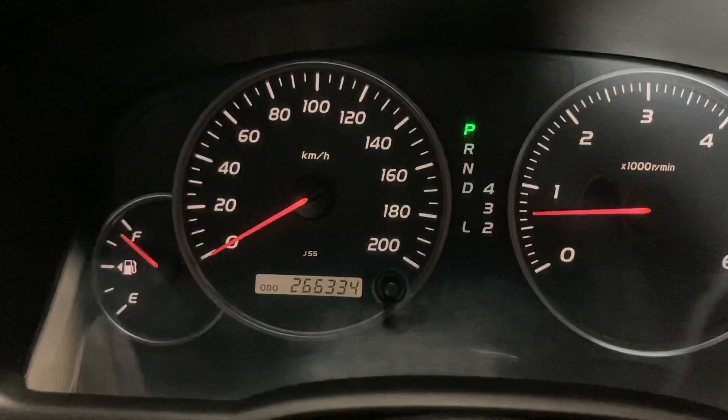But let's first quickly have a look at these readings so you can compare. If I've put the videos in the right order, when you saw a 266,300, that's this vehicle. There was probably a couple of videos on it, injectors and all that. Had an oil leak at the cam seal. This is that vehicle, okay? Let's have a look at these readings so you can compare and know what a 120 with good injectors reads at, okay?

One of the main ones we look at, which is available on a scan gauge.

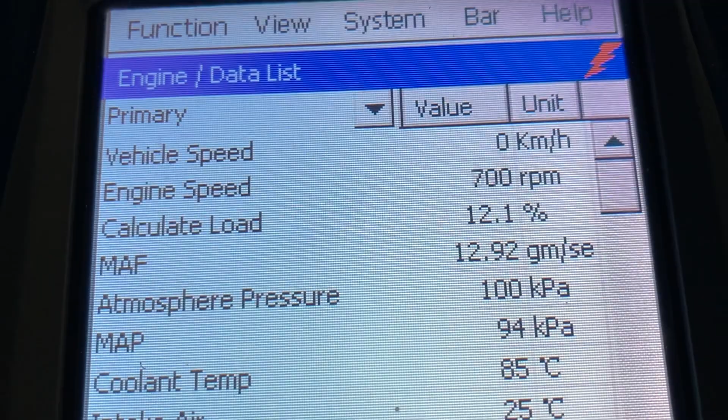But you can see the load reading. It's not just yak I'm talking. We need to spend the time for you to look at that load reading. One of the common ones again, 120 Prado, 1KD-FTV, 5-speed auto. Load, you've got a fair idea by now that it's around 11 to 12 when everything's working, happy days. Now that could change a little bit with a new suction control valve. This one's still got the short one, it'll get changed later.

Let's quickly slip down to those other readings, and then we'll talk about this noise in case you've got that noise and you want to know what it is so you can eliminate it, okay? I'll explain what it is and pop the before and after photos in there. No, let's finish this, okay?

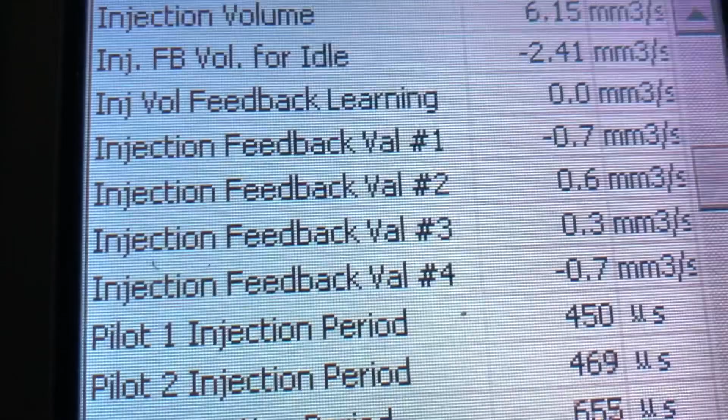Injection volume, at the top there. You can see it's around the 6 mark, a little bit under, a little bit over. For an auto, that's fine. It'll be lower in a manual. It'll be higher in a 150 Prado. Hiluxes, 4-speed, 5-speed manual, they'll all be different. You've got to watch the specific videos.

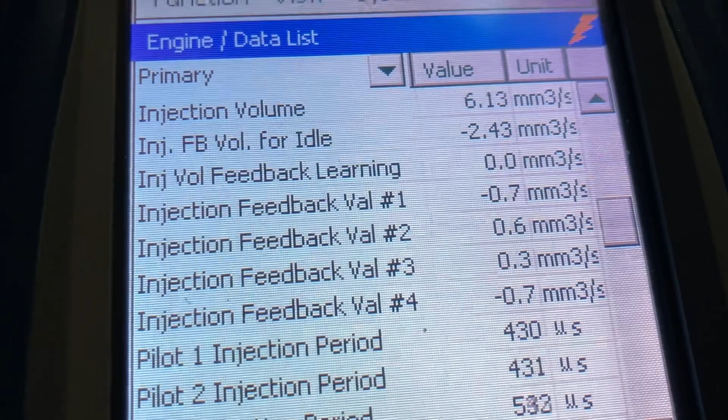So the engine's running hotter than normal for whatever reason, we don't know. But not an injector problem, okay? When it got to that temperature, maybe there was something going on with the combustion. Anyway, long story short, they tested fine.

Since then, we've put them into another vehicle, a client slash friend, because we want to do multiple tests to confirm. So they're in another vehicle. It drives beautiful. It's quiet. We can push it around and it still doesn't get hot or anything like that, like this other vehicle was. There's nothing wrong with the injectors. So prior to that confirmation, obviously, I have to pay for the testing. I gave him a small amount of money back for the injectors, but it put me in a position, what can I do?

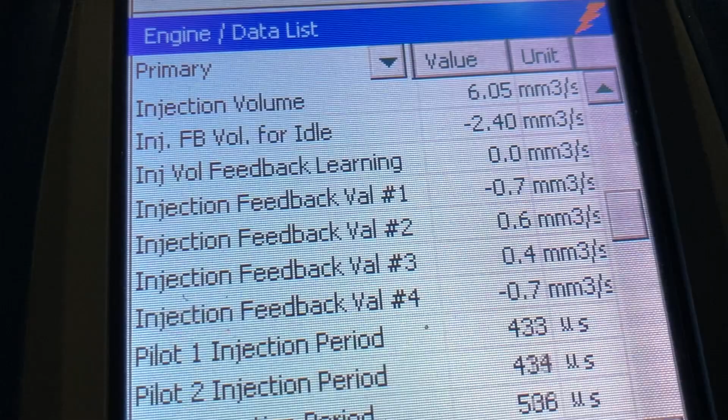There was nothing wrong with them, and you've actually ended up with who knows what, and especially who knows what sort of job. Anyway, moving on back to this. Feedback values, don't worry about them, because people worry about things too much. See, we go off topic, but it's always important information. There's going to be 3 topics in this video, right?

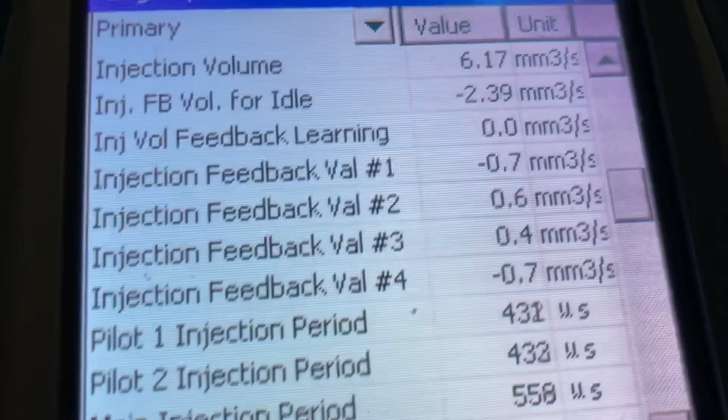We've never had a problem with a brand new injector, okay? Thousands of injectors. They're built by machines. We check them for damage. We've never had a problem, okay? Feedback values. If we see a reading like 2.2, or the highest I normally see would be, you might see a 1.7, minus 1.7, 1.5, somewhere throughout the whole range, worst case scenario.

When they're cold and they're warming up, I don't really care. These things happen. Let's have a look at what it is once it's fully warm. As long as it's not going over 3. If it's going over 3, that's the limit. Then we want to look at all the other readings. What's going on? Let's do some investigations, okay? So I want you to relax a bit if you see readings like 1. Who cares? I don't care what it was before. Old flogged injectors can have really even feedback values, and new injectors can have readings.

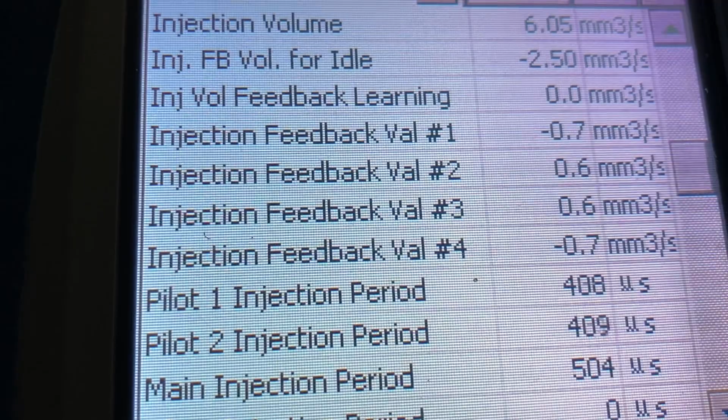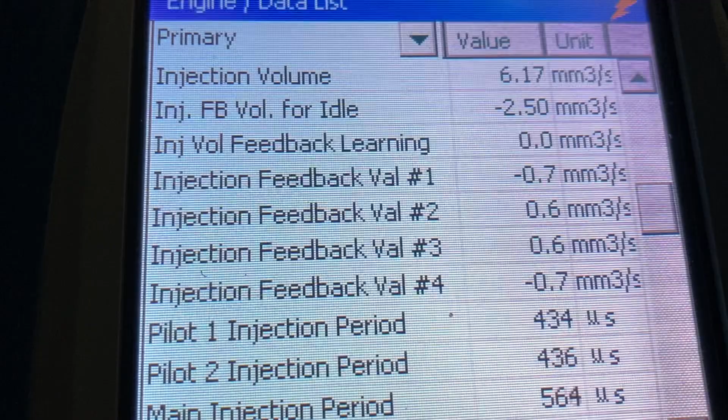That's why it's not just my talk, yak, yak, yak. You get to watch these readings and see what's happening, and by now you should know. You can see pilot 1, pilot 2 now. You know that they're normally around 430, aren't they? And see how it's jumping around, going 400, 450, okay? This is telling us probably fuel pressure. That suction control valve is causing problems.

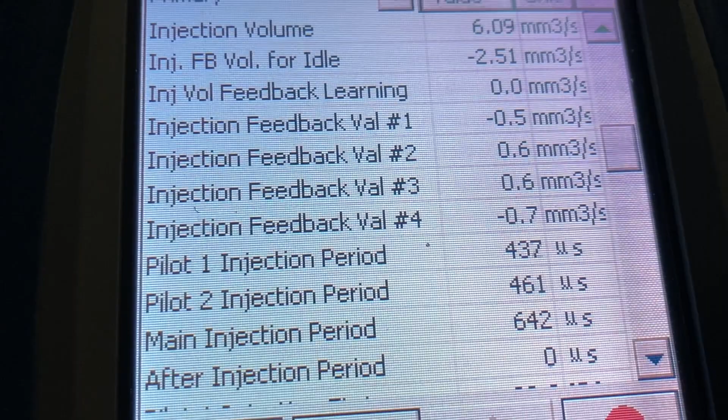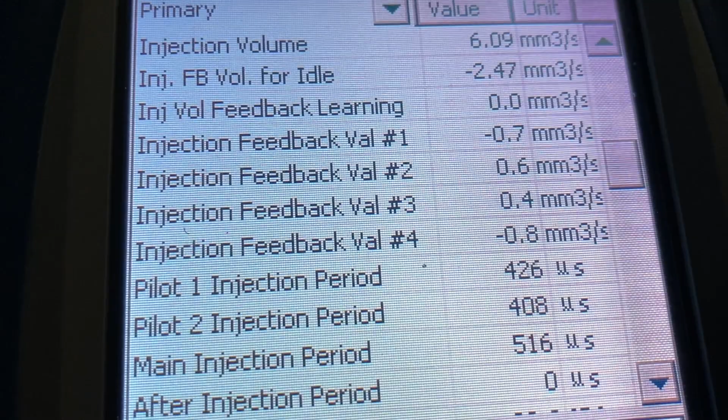Unfortunately, we're not replacing the SCV. The client's probably going to do it himself at a later date. So it'll be hard to show you feedback on this one, but I'll tell you what's going to happen. Pilot 1, pilot 2, they're going to end up around the 430 really steady when that SCV's changed. But you can see the main injection period, it should be around the 550, 600. It was steady before. This is not the first time I looked at the screen. It was quite steady around the usual 550, 600, but fuel pressure is going to mess with everything here.

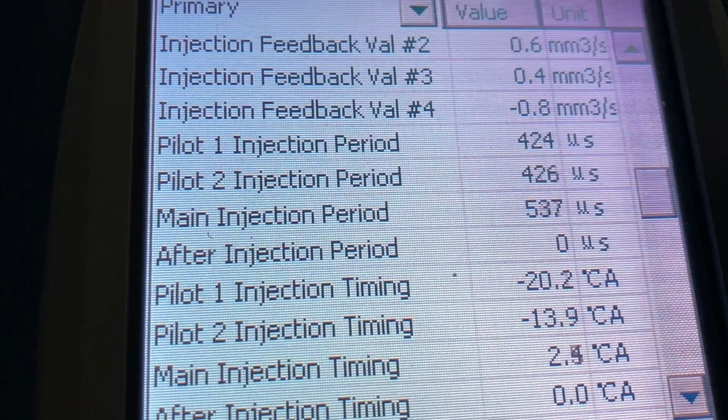So let's go have a quick look at the timing. We won't waste too much time. We're nearly out of time. I'm trying to give myself a 10-minute time limit, and I've got to tell you about that other noise and put the photos in. I put a 2-minute video out there, we just get all these questions, so I try and include the info. If you want more info, watch more videos. I haven't got time to answer the questions. That's why we do it in detail.

Fuel pressure, this is what we want to look at now. I'm sure we're going to find it jumping below 30 and up to 40, all over the joint. Normal, I've told you before, is 32 to 35. See the target, 35? That's what it wants to be. When everything's good, I can tell you from experience, 32 to 35 is normal. That's what you're going to see on all the vehicles with good SCVs. If you see things dropping below 32, it's not normal, something's wrong. If you see them going above 35, let's say 36, something's not right.

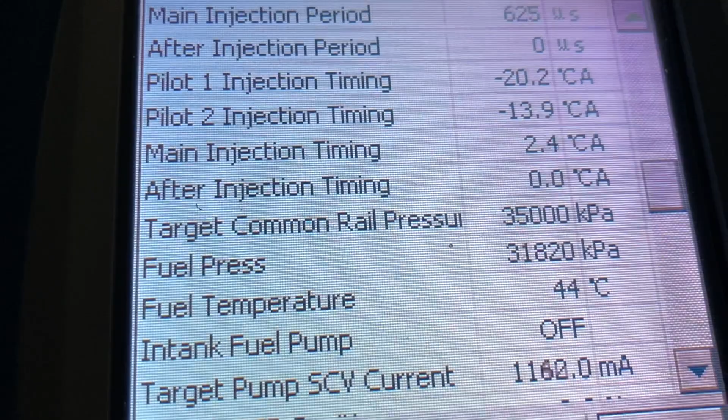Did you just see 29? While I'm yakking I've seen 29, there it is again, and I've seen 38 right then, okay? That'll do me. 29 to 38, up and down all over the joint. Suction control valve, the short one's rubbish, it's sticking, it's causing problems. Nobody should have a short suction control valve left in their vehicle right now. And if this is your first video and you just found that out, that's why you watch the videos till the end.

We thoroughly check everything. You get what you pay for. The vehicle isn't coming back. No comebacks, no problems. We're going to get it right the first time to the best of our ability, and it works pretty well every time as far as I can remember.

If somebody knows otherwise, put it in the comments and remind me, and I'll put my hand up and say, yeah, you're right. Like the time that I forgot to, I can't really talk about that one, but it's... Anyway, well, how do we talk about that one? There was something I forgot to do, but if you know the whole story, you'd go, of course you forgot to do that, because it's not what you do. But anyway, it was what sort of had to be done this time. But anyway, so there's one, we'll call it one comeback.

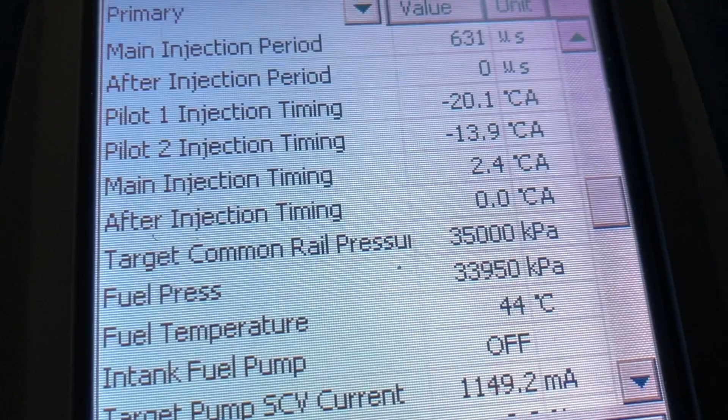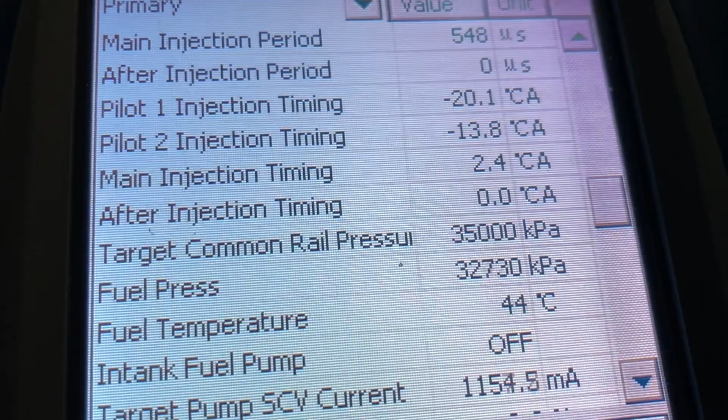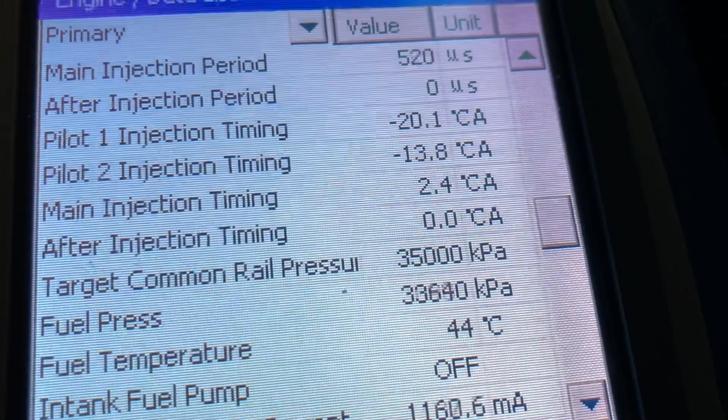Anyway, better get on and tell you about this wiring loom. So underneath, it clips on the side of the transfer case on the exhaust side. There's a wiring loom there, and the plug clips on the little bracket. There's two clip places. There's one where you clip it and the plug's facing down, or one where you clip it and the plug's sideways, and then the plug and the wiring loom rubs on the body of the vehicle. So when you're sitting here at idle, the whole thing's vibrating and it's tapping against the body of the vehicle, and it's so annoying, right?

So I rang him up because I was giving him a rundown on what we've done and where it's at, when it's going to be finished and all that. And I said, mate, you noticed that tapping? And he goes, oh yeah. I said, I think I know what it is. I forgot to fix it. So I've just slid under the vehicle literally directly before I started this video, and I took a photo before and I took a photo afterwards. So just have a look in the photo before. I'll try and get them in the right order.

You'll see there's a little spot for the clip, for that wiring loom to clip in, and the old mark from it from years and years ago before they did the engine, or unless somebody else has done some other work, I doubt it. So I just went, without looking at another vehicle, and I don't take these wiring looms on and off, so I don't remember. I went, I reckon it's meant to go there. So I unclipped it from the side, clipped it in the other spot. It looks right to me. That's the photo afterwards. I'm back in the vehicle now.

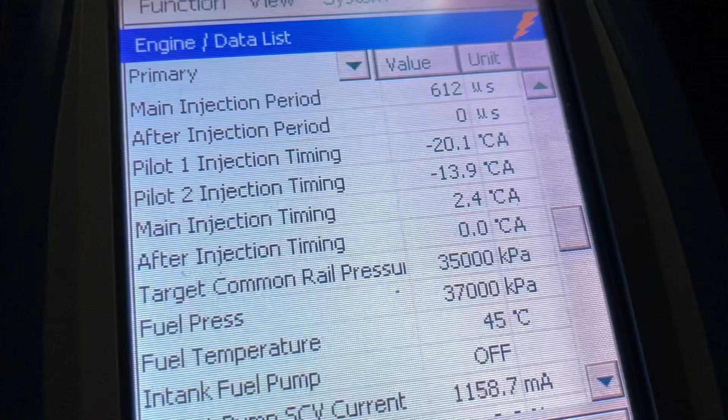Can you hear any noise? I can't. The engine mounts are stuffed though. It's one of the other things that needs to be done. They're really bad, the engine mounts. You know, 06, 7, 8, Prado 120s, those sort of thing. If you've got a really bad vibration at idle, engine mounts, check out our videos. All the info you need's there.